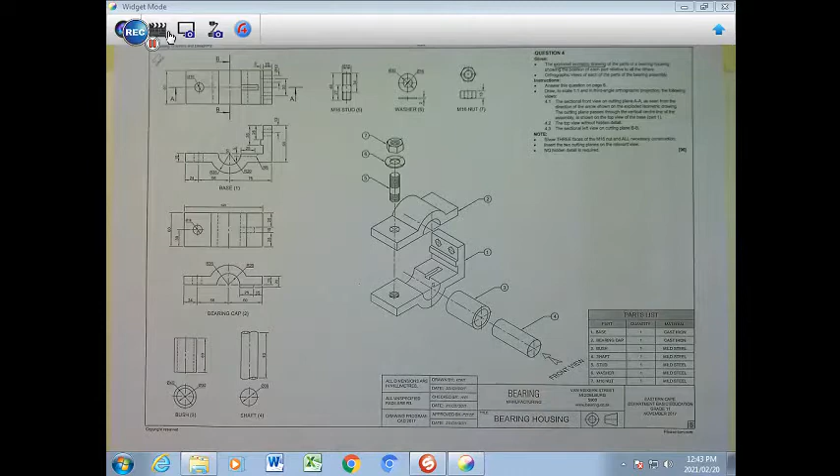So we firstly have an exploded isometric drawing, which is this part over here, and I'm going to put a little line around it so that you can see, and this view tells you how to put the different components together. And then you have orthographic views of each of the components, and you just want to cross-reference here.

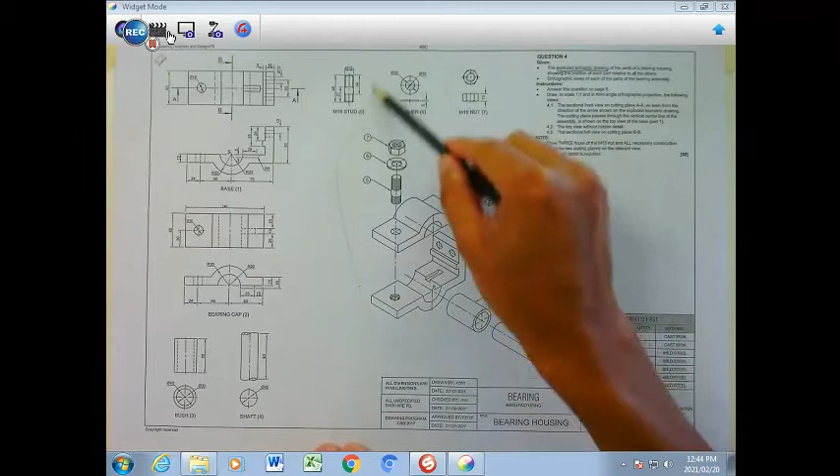So we're starting with this nut, M16 nut here, and there you have this nut, and I'm going to put it in little cubicles. Then you have a washer that's there, and then you have a stud, M16 stud over there, and then you have this component number 2, which is your bearing cap, which is that component there.

Then you have component number 1, which is your base, which you're preferably going to start with. And then you have your component number 3, which is going to be this bush component there, and then the actual shaft component, which is there. So those are the components that actually make up the assembly drawing.

Right, so when we are going to start, we're probably going to start with one of the main components, which is component number 1, which is your base, and then work our way through each of those.

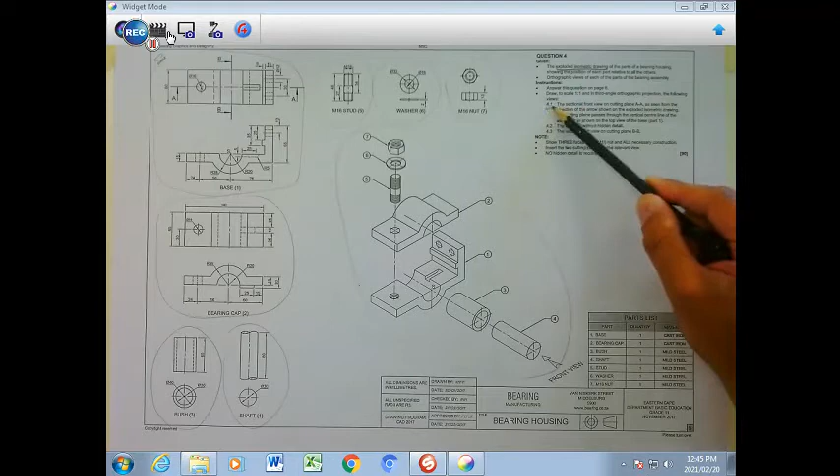But let's go to the instructions. They request of you to draw to scale 1:1, which is full scale, 4.1, a sectional front view seen from the arrow as you are going to view it.

So all of these things that face you will be drawn first, all in an assembled way. And then we have to move to a top view, which is going to be seen from the top here.

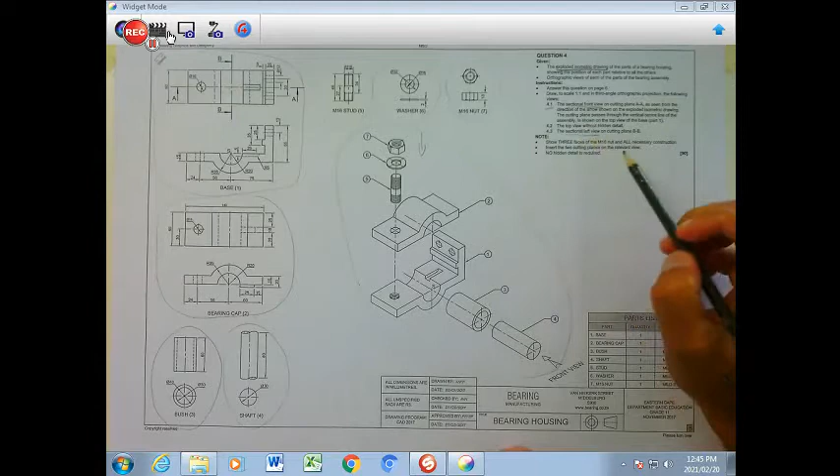And then we will have to draw 4.3, which is a sectional left view from the left hand side. So you're going to move your positions according to the different views that we want to see.

Also note that 3 faces of the M16 nut must be shown, and the construction of it. And you must insert, please, all the cutting lines, in this case the 2 cutting lines on the relevant views, which will indicate, and then no hidden detail is basically required, meaning no dash lines will be indicated in any of the views.

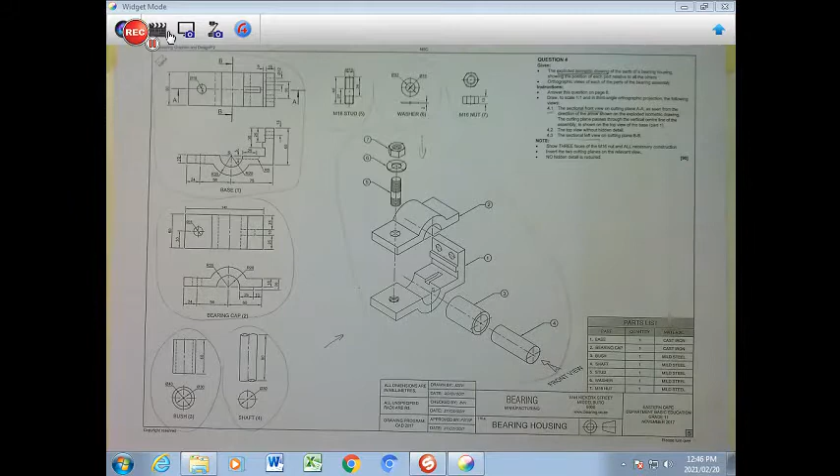Okay, let me start by just giving you a little sketch. So I'm going to use this, and this is where your planning comes in terms of the sketching.

So when you stand here and you view that, you're probably going to have this main part, which is going to look like that there, and you're only going to draw the outline of it like that there, and then this part is going, that part has a little part there, and then this part is going to be going on like that there, as you have it in this view here.

And then of course you're going to have this stud going right through there, and then you're going to have your washer here and your nut probably going on there. That is that part over there.

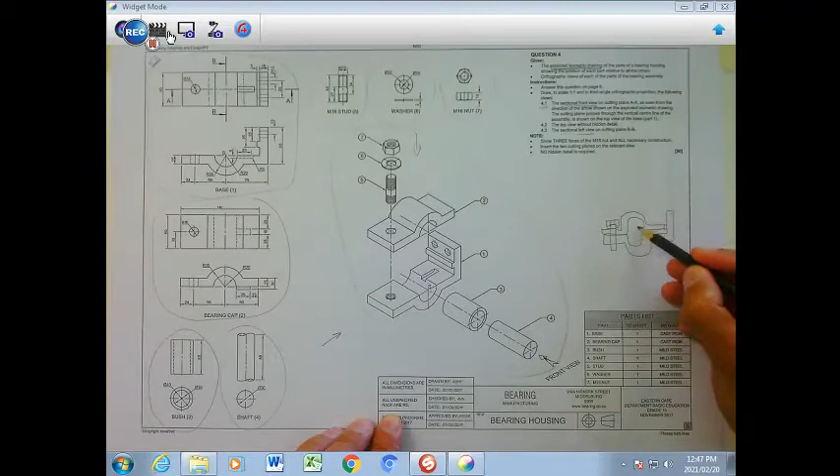And then of course inside here you're going to have your spacer first, which is your bush, and that component there will just eventually be inserted in here, which is your shaft.

So that is basically how it's going to be drawn, and then all these parts here will then be hatched. This will be hatched, this will be hatched, then the bush will be hatched as well. This part here, which is the nut, the washer and the stud, will not be hatched.

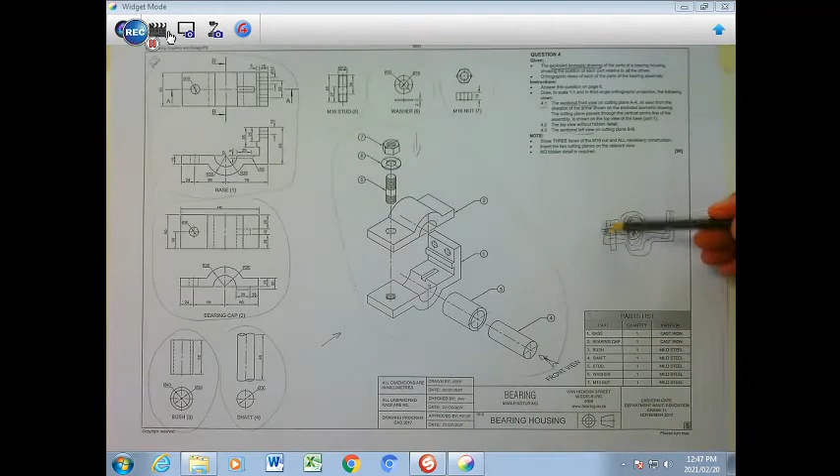Okay, and then of course you've got to project things here to the top, and you're going to have a top view, preferably of only that which you could see there, and obviously the construction of the nut and the washer will be visible here.

And then you're going to put in the cutting line right there with arrows facing up. Why? Because the hatching details will be here, so we're taking this part away, and that's what you're going to see there.

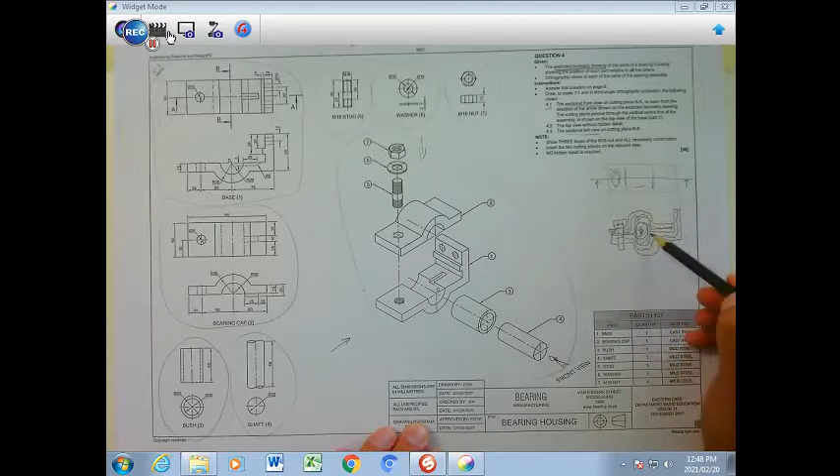And then you are going to move then to your left view here, and you're going to project over, and you're probably going to see only that part there, which is going to be that part over there, and then you're going to see this part here, which is going to be that part over there.

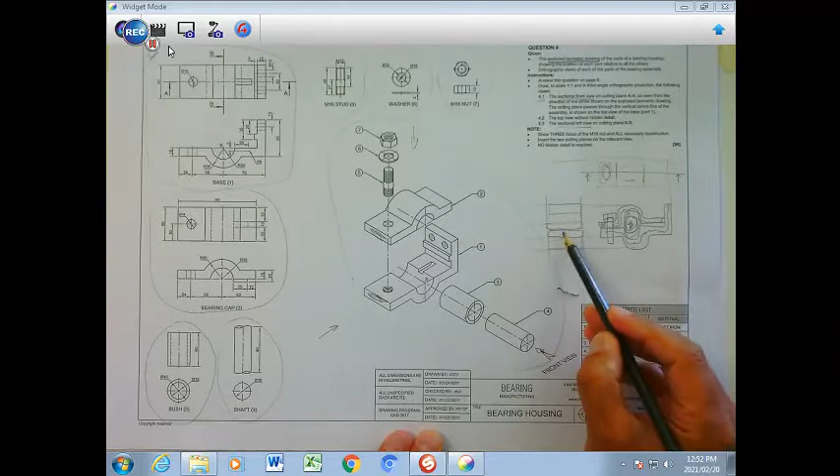And then that part is going to be the hump part here and the hump part there, and then there will be some parts on the inside here which you will be able to see clearly when you do your cutting. Your cutting line you're going to put in there with your arrows facing that way to show that this view is going to be a cut section.

So there will be more detail as you unfold it, and you will see strategically throughout the development of each of the components how it will be cut. But that is the order in which it is going to take place.

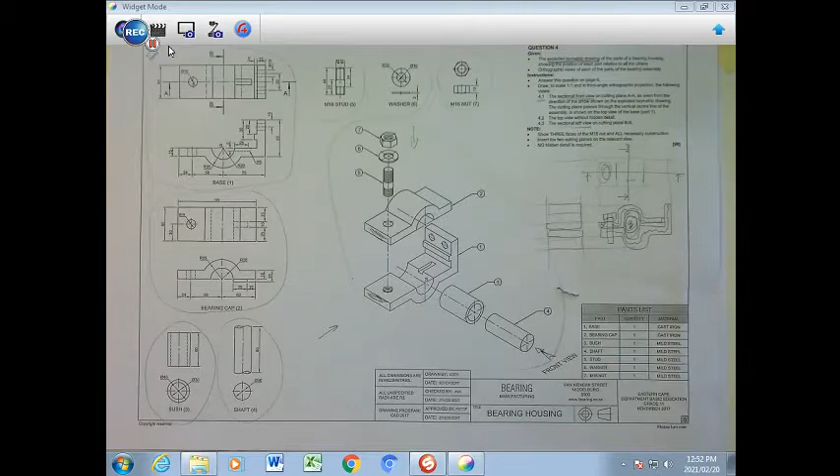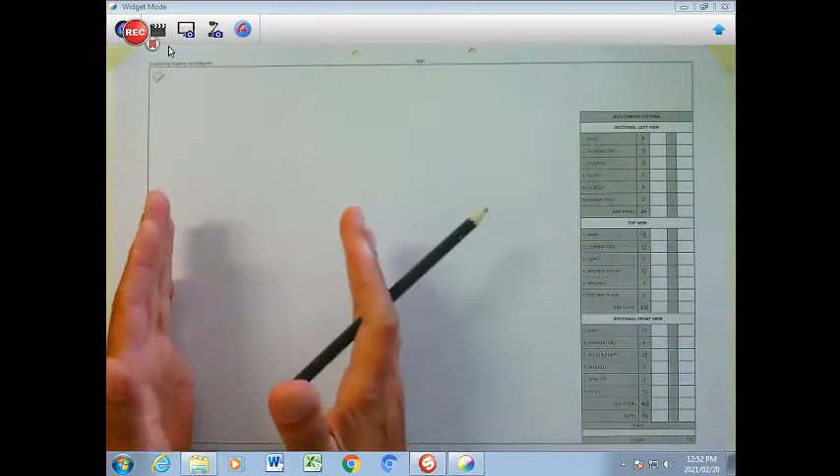Now I'm going to start with that particular component, which is my base, and I'm going to draw that component on this page here, starting towards the bottom, more to my right. So I have my top view here, and my left view on my left side here. That's good space planning. My page has been set up.

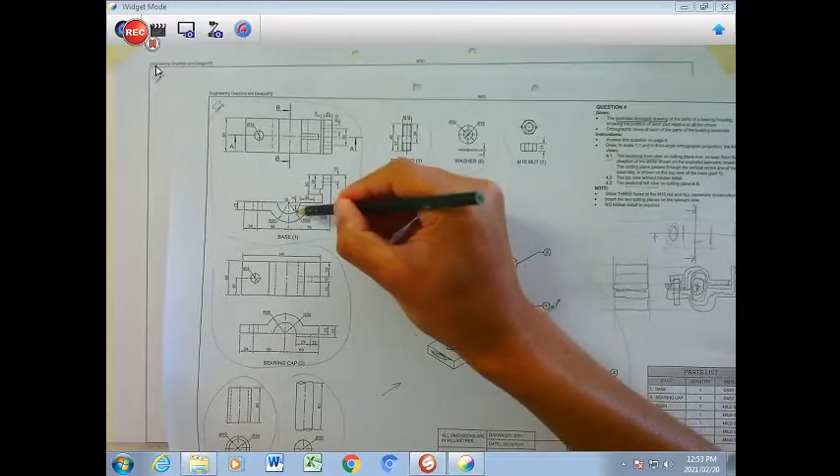You can see my line is aligned to my T-square, which is firmly against the side, and this is where the entire drawing is going to unfold according to the planning that I have. So let's look at the first one with all the dimensions and apply this as my front section and that as my top, and then I can also project it to my left as well immediately.

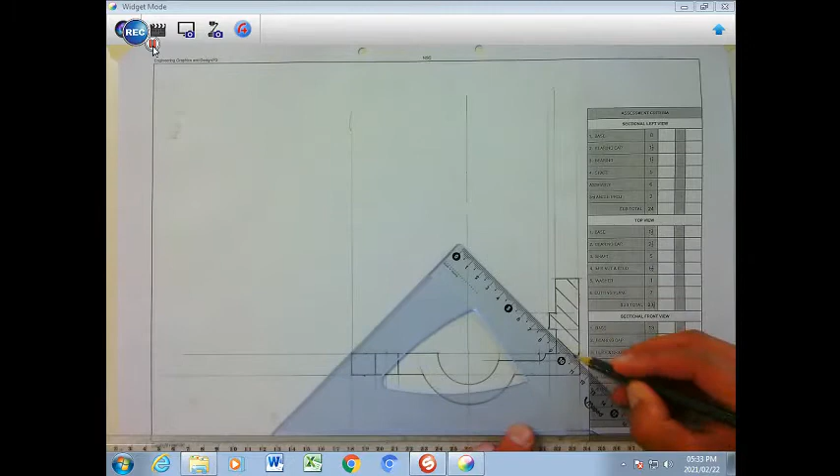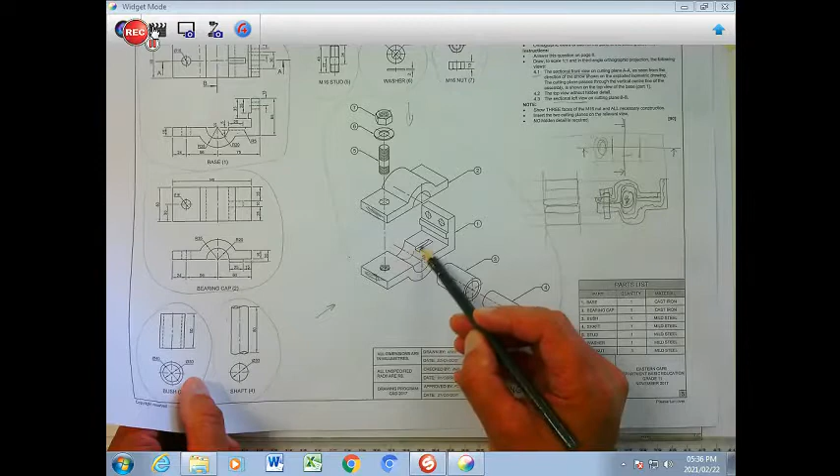Here I've drawn the base according to the specifications here, and what I've done is cut it immediately in the middle through that hole. That's why there will be nothing there, right through, right around the semicircle and in that little slot there, and it goes right up here. It goes in between these two, so it won't affect those two holes there.

So this is basically what you have there. The entire thing is cut. That's an open section here now that goes right around, and that's an open section there because of the sectional cut in the middle. This is a full section.

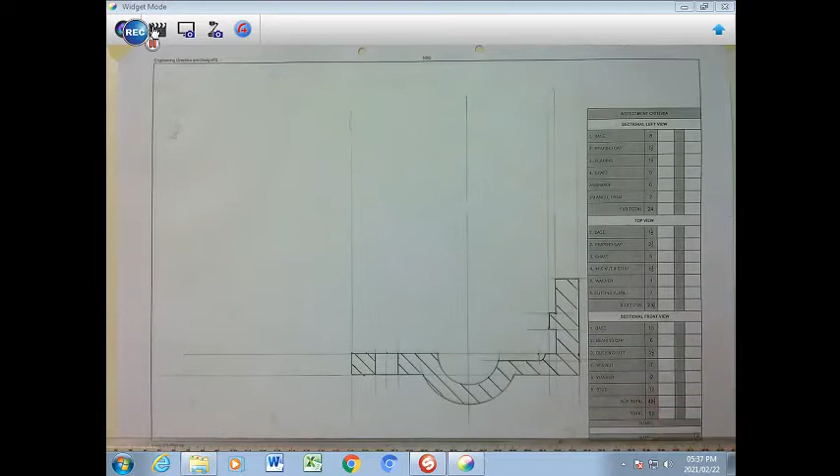We're going to proceed to the second component, which is basically your bearing cap on top, which lowers into the space over there.

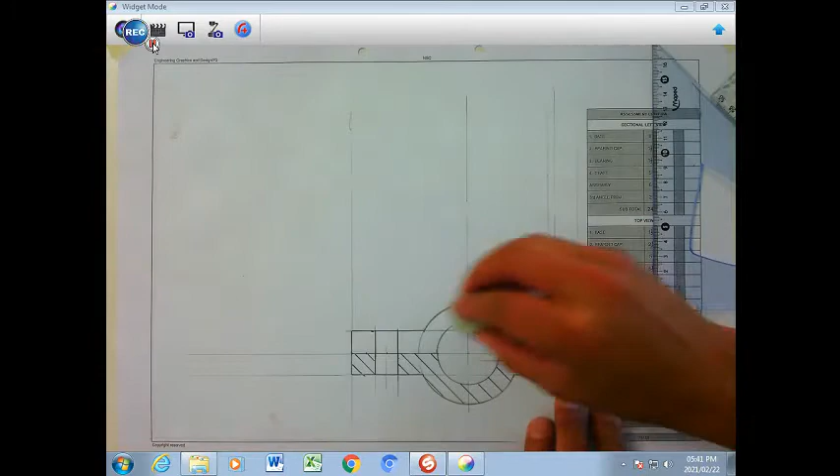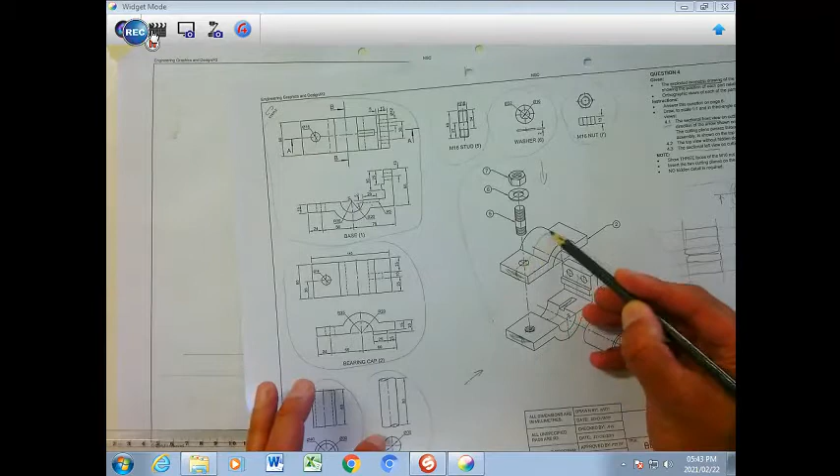I've cut the bearing cap as well, and it slides perfectly inside this little slot here, that perfect little part there. Goes right around. If you look at what we have, it has been cut as well through that middle, around the curved section, and right down in the middle there. And that's basically what it looks like once you have inserted that into that part over here.

Pay attention to this little detail there. It is an open section there. It's not, because of the fact that it goes a little bit around, quarter round here.

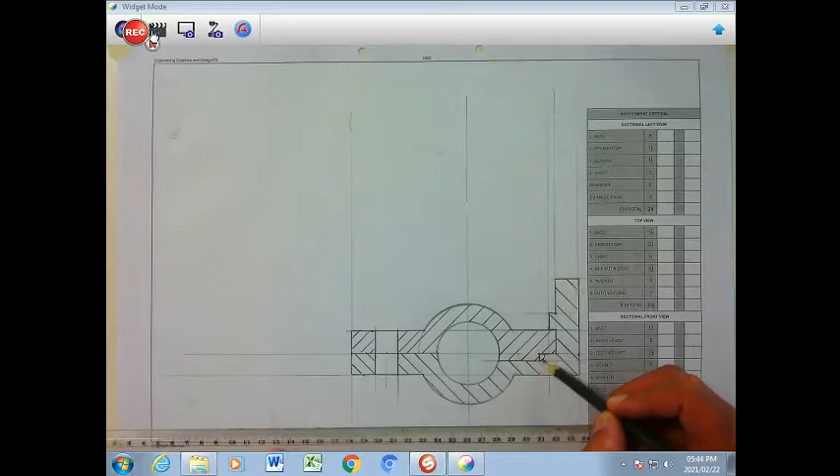So what I'm going to do next is insert the bush that goes into this area over here. And when the bush is formed here, automatically it will be the shaft space that will be created as well.

So I'm going to then cut the bush, and I'm also going to cut the shaft that goes in there.

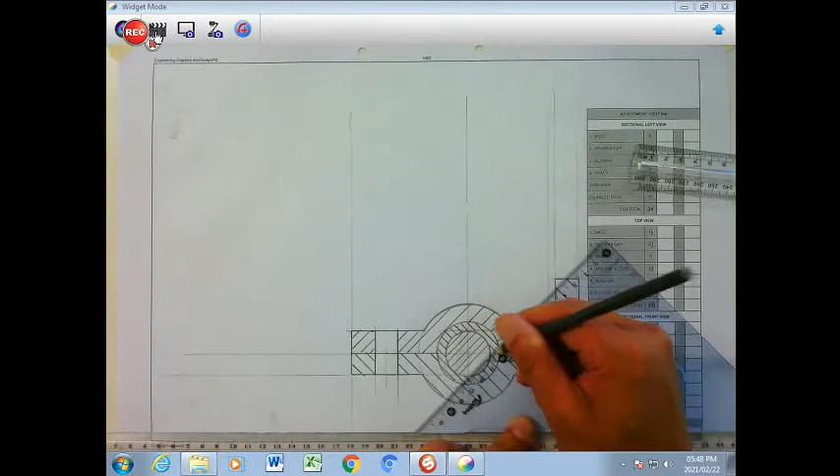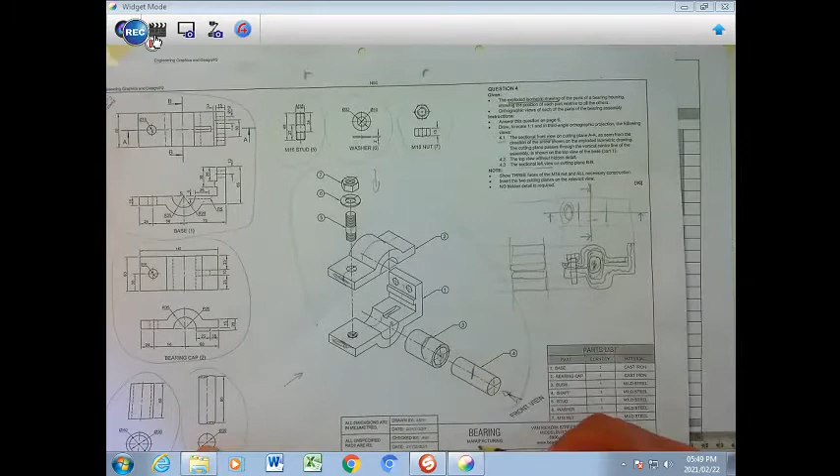I've sectioned both the bush and the shaft, because what I've done is cut that in the middle around this here, so that's going to be hatched right around there. The middle part is air, but because this fits inside that area over there, this is cut as well right over there. That's the reason why we get different types of hatching as it is here.

We turn our attention to this part over here, where we're going to insert the stud, and we're going to add the washer, and we're going to add the M16 nut into that space over there.

The stud, the stud basically starts from the bottom. It's flush here, and it goes up from here, the 48 measurement that I have on the instruction page.

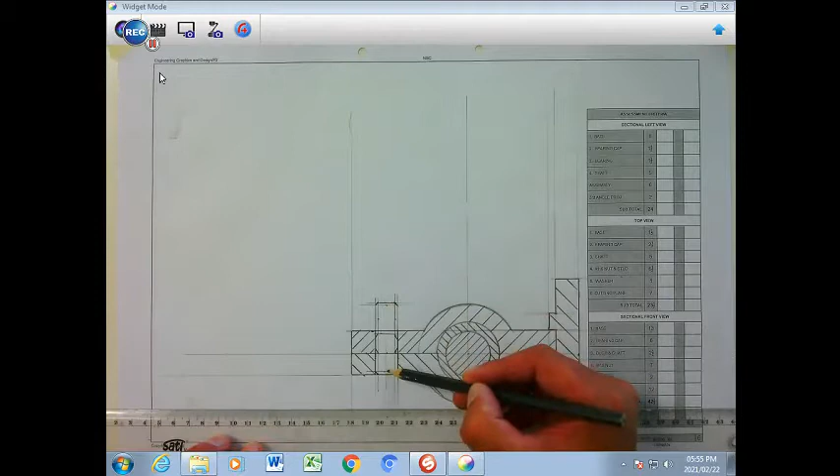You're going to find that you're going to have 1.6, so it's like 2 millimeters, 1.6, so you can round it off to 2 millimeters on the inside for the threaded portion. So I've gone 2 millimeters in, and I've gone 2 millimeters in there, and 2 millimeters in there for the threaded portion. This, of course, is the non-threaded portion, so you just need to indicate, according to the specifications here, that it is the non-threaded portion.

So the threaded portion goes in there and there as well onto your stud. Okay, we're going to do the washer quickly, and then we'll go and look at the nut.

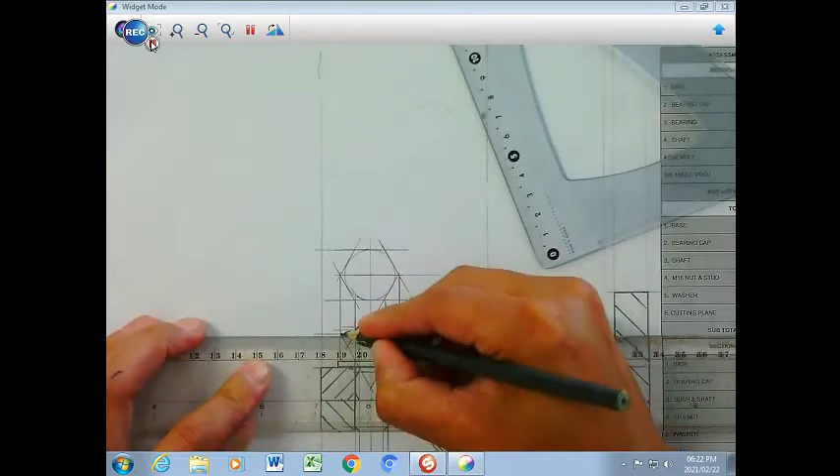Inserted the washer and the hexagonal nut, and a little part of the stud is sticking out at the top. What we've done here is drawn an auxiliary view.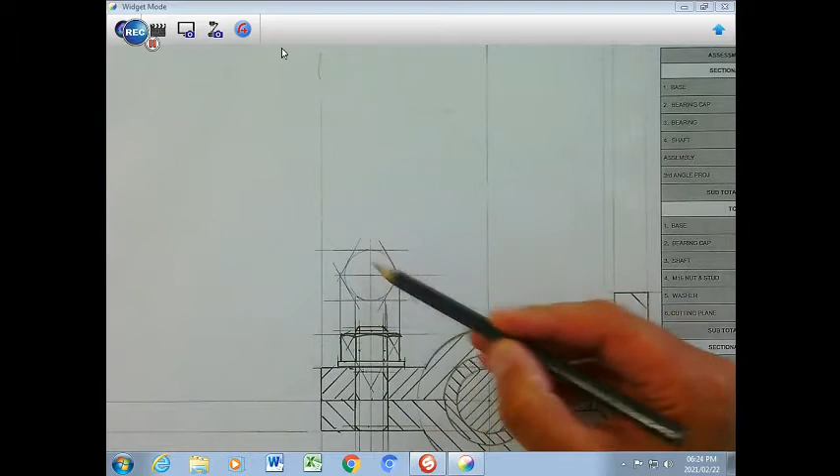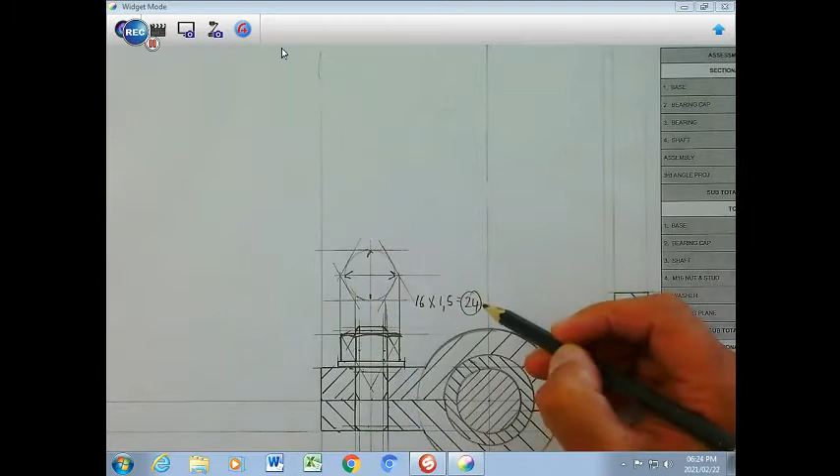So basically, the stud is an M16. You will have 16, the numerical value in front of the M, times 1.5, and that will give you 24, which is the diameter you'll see from side to side there. Or alternatively, you can use a radius by dividing that 24 by 2, which gives you 12, which you can draw comfortably with your compass.

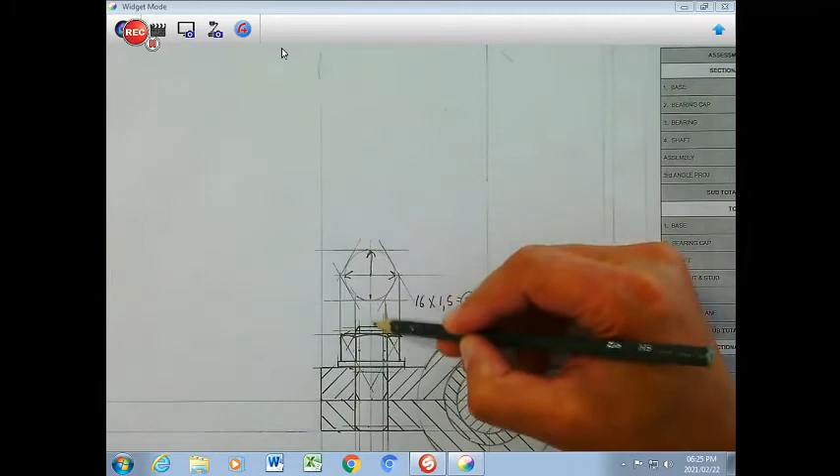Alternatively, it's better if you use a circle template of 24 diameter to draw that circle. This is just an auxiliary view. You can draw it any distance away, but like I've done here with a little gap in between.

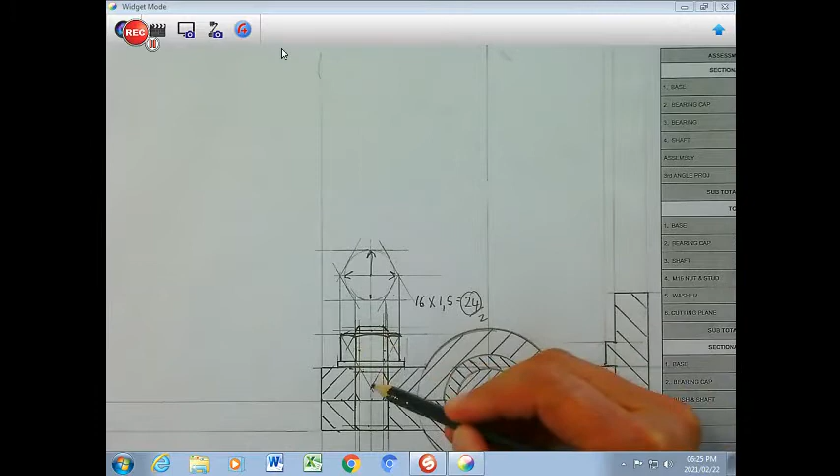I now have used my set squares and I've projected that down. This is all 60 degrees that I have here, projected down. My height I've gotten from my instruction page of 13. And then of course I've done the construction here of the nut by doing that 60 degrees, arced it from there, arced it from there, arced it from there.

And then that little part is a 30 degree angle with my set square as I've done. And then of course both sides and a line connecting, and then I just continued by drawing these lines or corners down onto my washer.

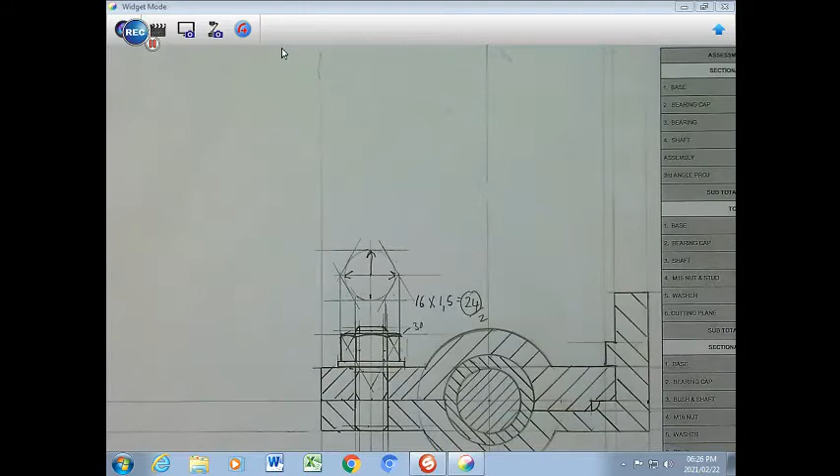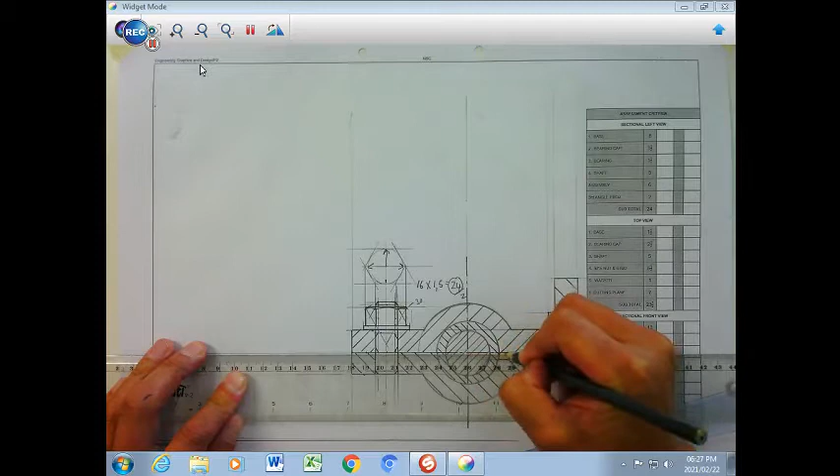I will then conclude this section front view by just drawing in my center lines. So I'm going to have my center lines drawn right here. It's a long short line, and it goes right through here. That's my center there, and part of it will be here as well, center. Just there to show that this is a cylindrical shape, and that is basically around that center point.

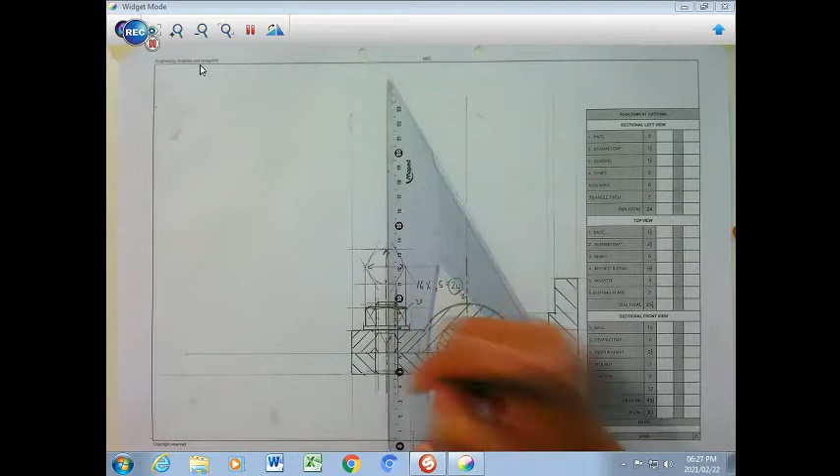You're obviously going to have a center line in the middle of the stud and washer and nut as well, like that there. Okay, and that basically concludes this view.

Let's move to the top view, which is very easy. I'm going to do the top view of only the part that I see here on top, with the nut and the washer and the little stud that will be visible. All other components will not be visible.

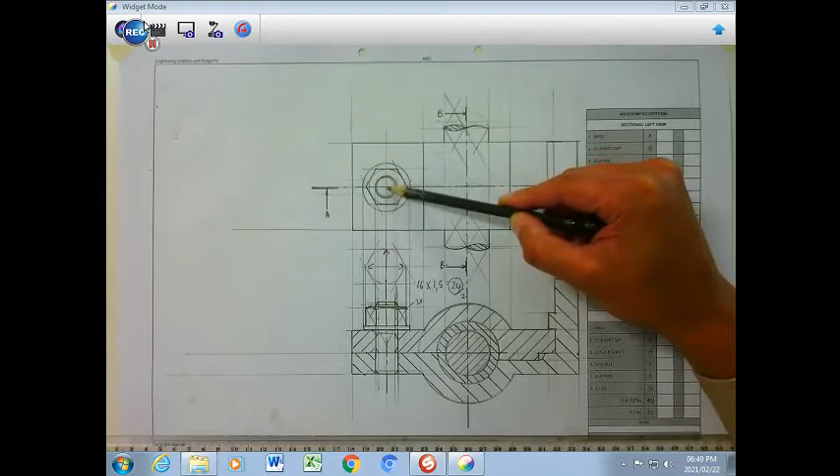So this hexagonal nut is turned onto this part here, which is the stud, and the washer is in between the nut and the bearing cap here as well.

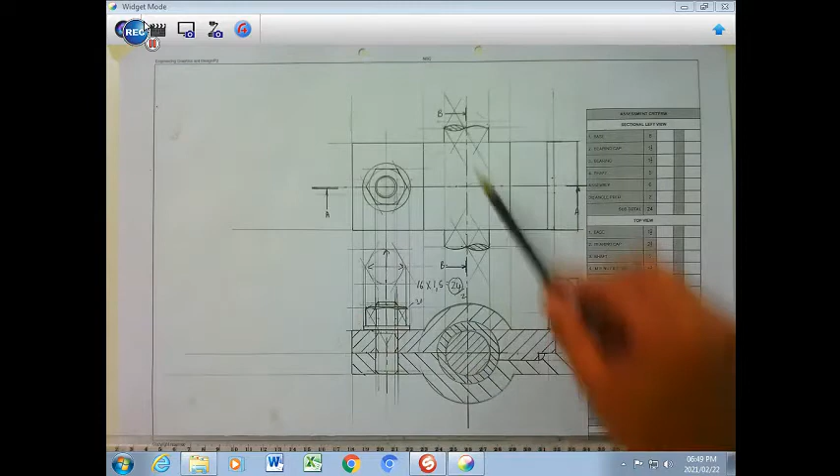So, and then finally we've had the cutting line here, AA, which is right in the middle, creating this cut. And then we've put in the cutting line simultaneously for BB, which is going to have an impact on this side that we are going to do now.

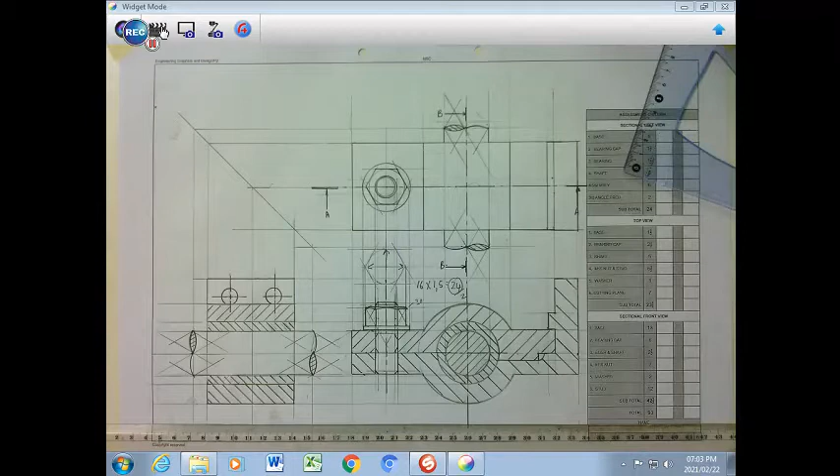This basically concludes the section left view. So you can see that the cutting line runs right here, it cuts through that part over there, which is that part over there. It cuts through the bottom part, which is that part over there, and the bush, both top and bottom of the bush.

You will find that the hatching of this one, they are different, but the bush, they are the same. The hatching parts are the same because that is one component. It goes around the shaft. The shaft does not take hatching, but because it has S breaks, that little part there actually does.

This means it continues longer than what it is on the page. Don't forget the back part here. There are two holes inside this part here where the cutting does not actually show the holes because it cuts in the middle. There you will see the cut is in the middle.

You would have had dash lines here, dash lines there, but no dash lines required for these drawings. But you need to ensure that you put in the holes as it is visible from this side that we are viewing it.

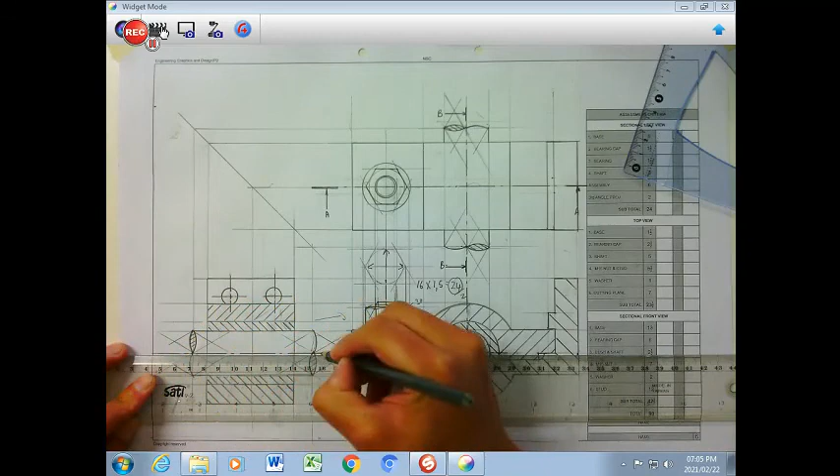Right, and that basically ends it off with the last center line, which we just have here in the middle. All these center lines are extremely important, and that basically concludes your drawing assembly 2.